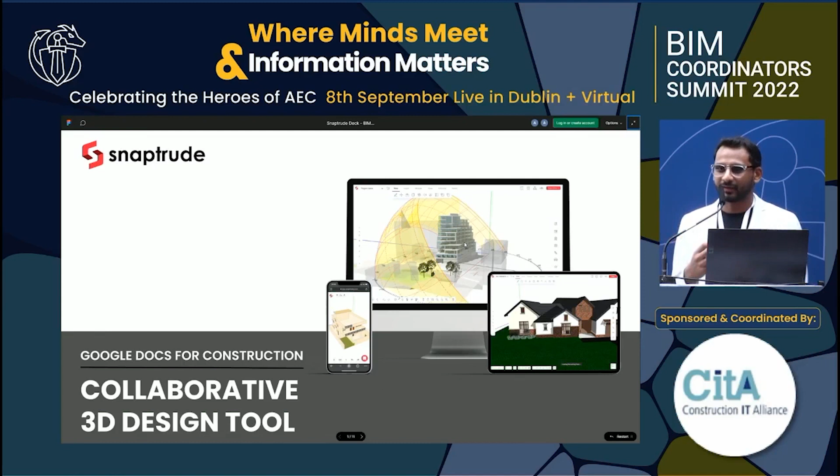For me personally, I started as a geometry researcher with a computer graphics background, working with architects, building plugins to Revit, SketchUp, and various other tools. I realized people are working in very siloed environments, and there are so many workflow issues which we're trying to solve using bandages. What if these bandages never existed? What if the entire workflow were created from a user's perspective with a modern user experience in mind? That's what we started doing.

One observation I found is most of these tools were built in the 90s, and they've dragged along that concept till today, even though we're in the 2020s. Every other industry has moved beyond what was built in the 90s—modern user experiences, cloud, web has really taken over every other industry except ours. People have been vocal about it, writing open letters to Autodesk and other companies complaining about these issues. And that's why we need to develop plugins to put bandages on this system.

If you look at it generally, collaboration, which is so important in an industry like construction where you have so many stakeholders, is so broken. The best tools we can use today are predominantly things like Bluebeam or Construction Cloud. The sheer amount of usage of Bluebeam shows that users really want to collaborate, but there's nothing great about any of the tools to enable them.

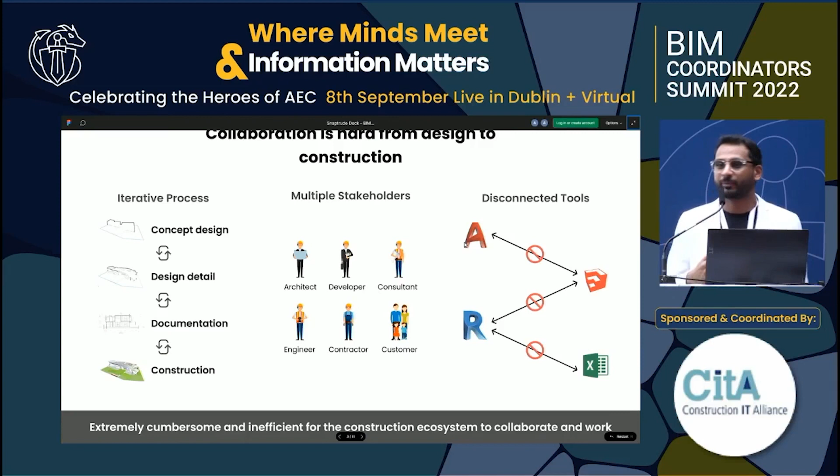Interoperability is something I don't want to dwell on too deeply, but when a Revit 2021 file cannot open in Revit 2020, how do you expect it to work with SketchUp or any other software? We're in a mess of a situation where you're just trying to make the process work instead of making the design work, which should be the priority of the system.

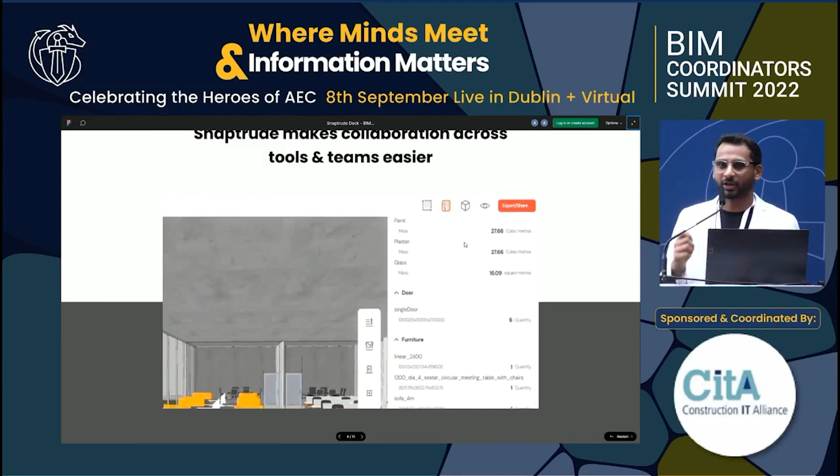That's where we solve this exact issue. What if you could collaborate literally on a web browser with a modern user experience on the cloud, and have that entire system automated in nature—so you're not just doing manual modeling tasks, but focusing on the design. And over all of this collaboration, we felt feedback loops are extremely important.

So every time you do a design change—say you're doing a multifamily residence and you want to make one of the bedrooms slightly larger—you'd immediately want to know whether you're compliant with local regulations, what's the impact on the budget, because the developer won't want to go beyond a certain buffer, and whether the climate ecosystem is going to support this design change or not.

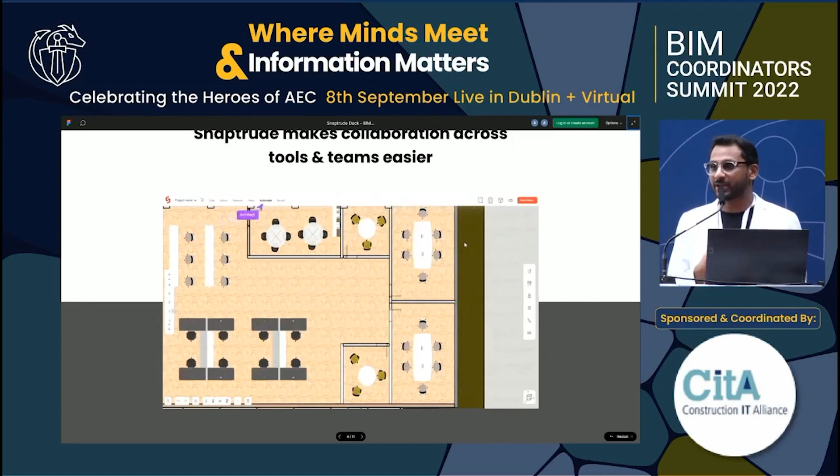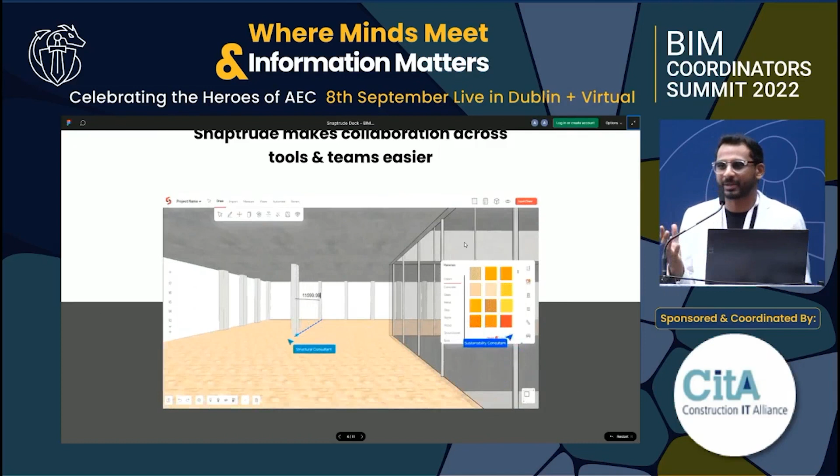All of these design decisions are so critical, but today it takes weeks to generate the data points, and most of the time people don't even do it for mid-market segments because who's going to do that, who's going to pay for it? What if you could actually build in that feedback loop as you're designing?

You just change one of the bedrooms, and immediately you know it's going to cost $20,000 extra, it's going to have this much impact on climate. So you're actually collaborating and making these decisions faster. And it doesn't mean you have to do the design from scratch—you can interoperate with any of the tools, something the industry has been plagued by for the last, I don't know, 30, 40 years.

So you have a Revit file, a SketchUp file, or a Rhino file. Click a button and import it into Snaptrude, and use it to start collaborating with any of your teammates, external consultants, or even a customer who can provide valuable feedback, making the feedback loops much shorter.

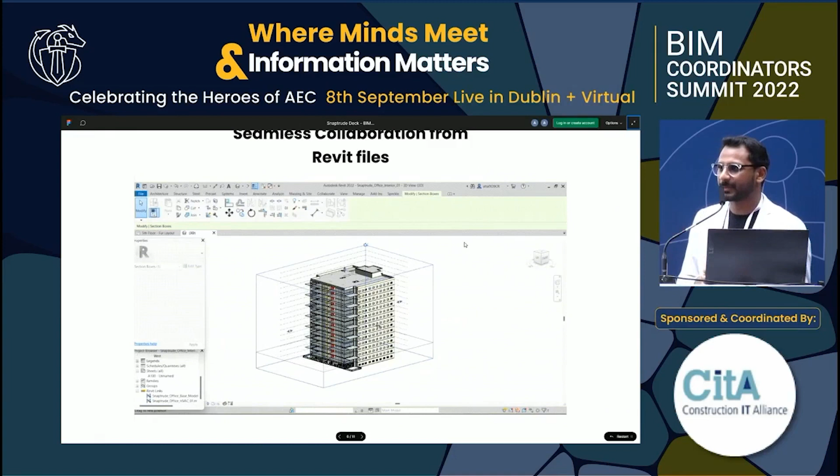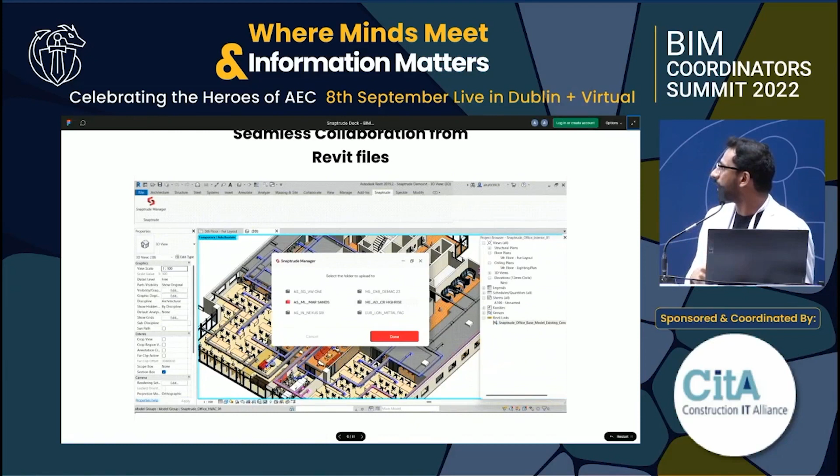This is an experience I'm showing where with a Revit file, you can just create a section box view, hide or show some elements which you want, and just click a button to bring it into Snaptrude. Once you've brought it in, it's totally editable.

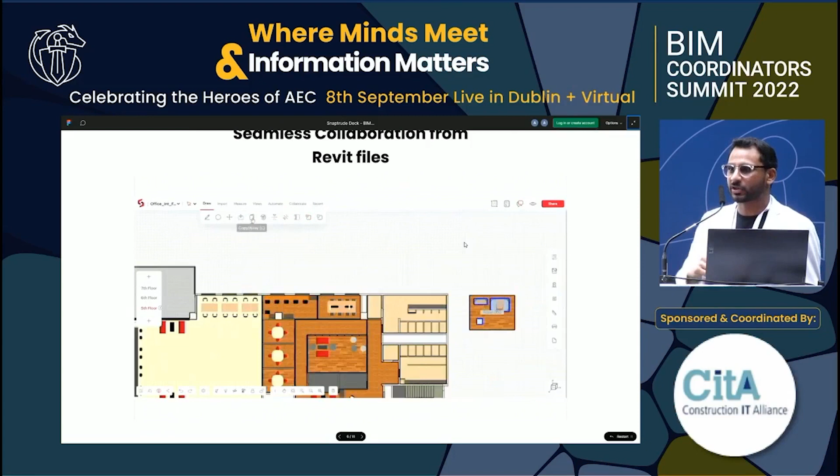You can invite your colleagues in, exactly like Google Docs—external consultants, internal team members—and start editing it. You can see all of their cursors so they can point out the right feedback you need. While collaborating, you can generate valuable information like costing modules, schedules, area programs, everything.

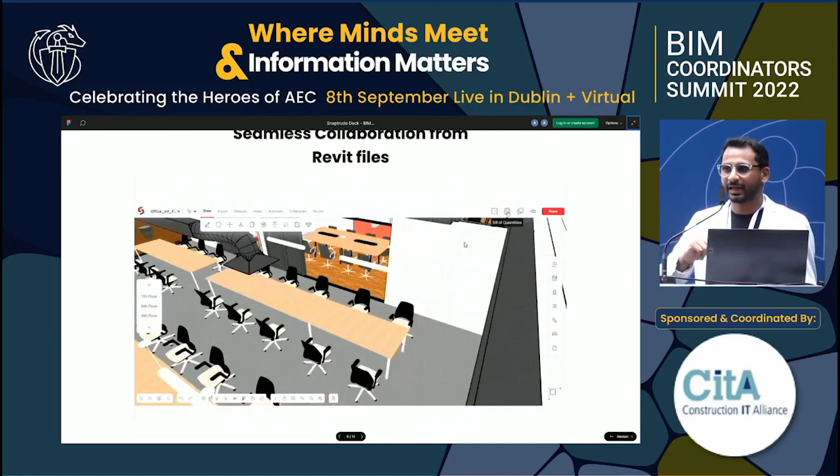So here, we're just adding a few doors, windows, modifying the parameters of one of the doors. And whenever you're ready, whenever you want to go to documentation, click a button and export it back to Revit.

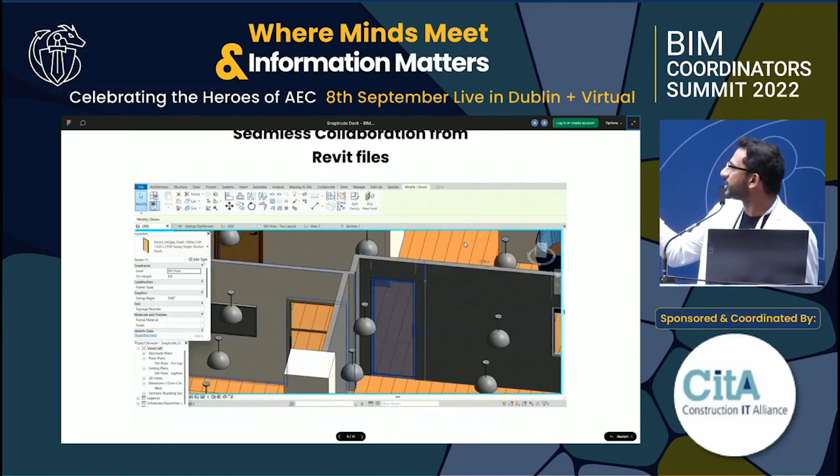So I come over here, reconcile all the changes, select which project it was, and everything is updated over here. You can see the furniture is updated, the door family is updated, parameters are updated. So collaboration is something which is totally solved with this interoperability.

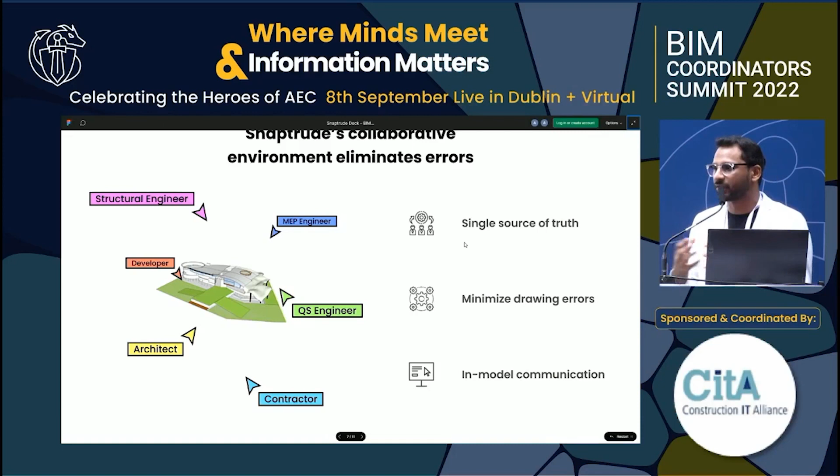This leads to a single source of truth across your entire ecosystem, which the industry has not been able to do, minimizing every kind of error because everybody's on the same page, and then in-model communication, both real-time synchronous communication as well as asynchronous communication.

On top of all of that, which I wasn't able to show in the videos, you can actually see the change logs over a period of time, how the design has evolved in terms of these parameters. So in the last 3 months, what's the variation in cost with all the design changes?

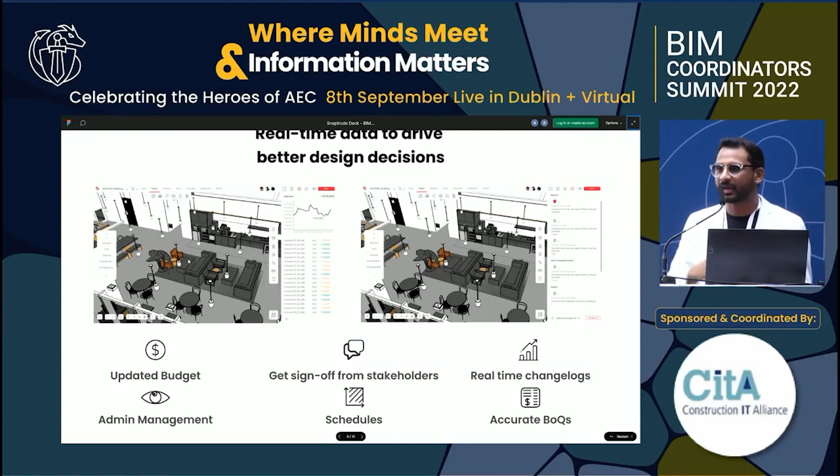You can also layer in an enterprise sign-off system, because you don't want a junior architect to just come in and do a $1 million change into the project. So you need a permissioning system where you need approval from the principal architect or the main BIM manager, and it automatically keeps generating reports as you progress further.

It also generates very detailed bills of quantities, exportable to Excel, or you can keep it inside the platform itself, itemize it, tag them. It's in a live environment, so you can do back and forth, and it includes subtraction—so all the clashes are resolved while the BOQ is getting calculated.

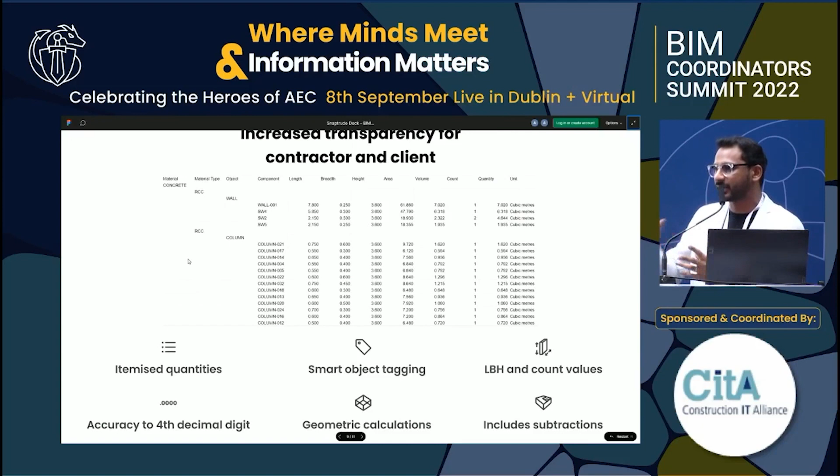And we do it for the customer as well. So if you are working with a certain contractor and they need certain kind of logic ingrained into the BOQ, we actually accommodate that request as well.

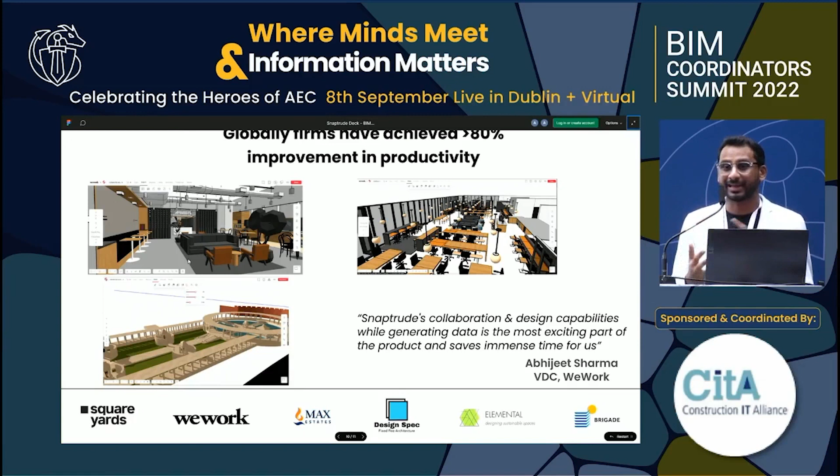Now we have global customers seeing greater than 80% improvement in their productivity. We have a client in commercial interiors who used to take about 3 days to submit their first initial concept design proposal, and they're able to do it in 90 minutes flat today. That time saving is reinvested back into iterating, designing better projects, and making them more efficient.

We are not just here to replace existing tools that were built in the last 40 years, but genuinely asking how we can help the industry design better buildings, efficient buildings, sustainable buildings, faster through this environment. Thank you so much.